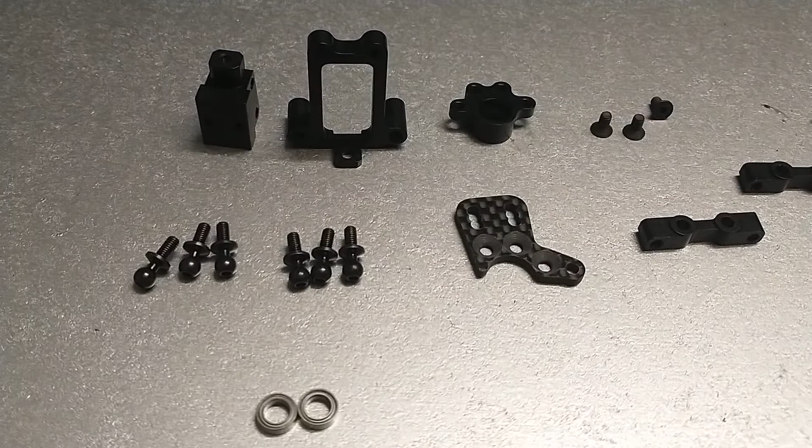I organized all the parts. We got a bunch of pivot points and some other miscellaneous parts. We have 3 lock nuts, some different types of screws oriented by size, and 2 washers that are really thick, with one set aside that's thinner. So you've got 3 of those washers, but one is thinner than the others, and you'll have to cut them out of a bag similar to that.

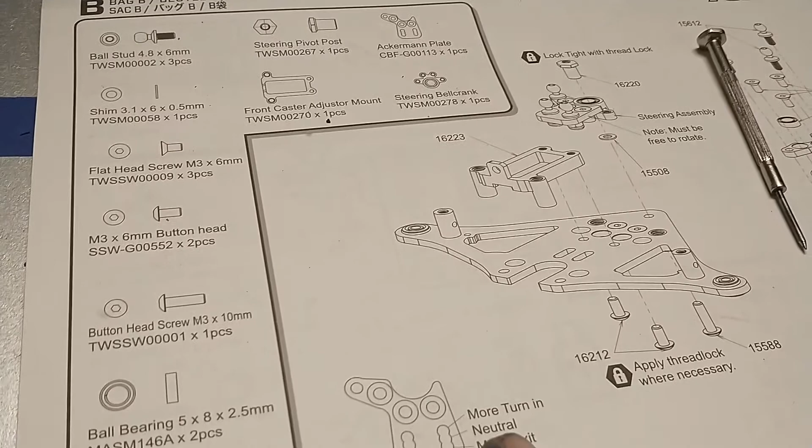So let's begin. Let's see what we're looking at right here. We've got to assemble - we've already done that. Now we're going to assemble this stuff, and these are pretty good at being a 1-to-1 ratio. If you don't know what 1-to-1 means, it means this screw, whatever it is, should be a very close match. We're just going to attempt to assemble everything as it's seen right here.

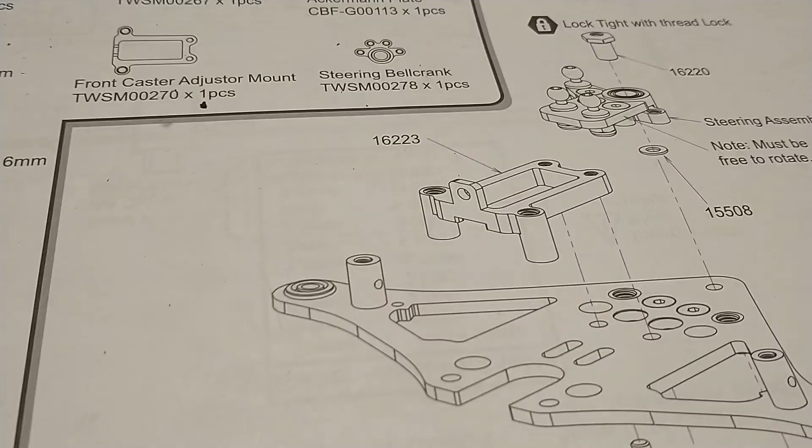Okay, so at first glance it looks pretty straightforward. We've got this piece right here - it slides into those holes like so, and sits recessed inside those 2 big holes. So you're looking for the appropriate hardware.

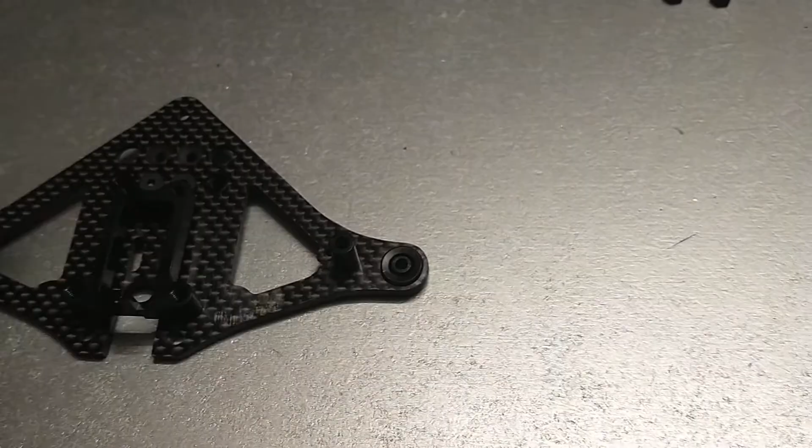This, in my opinion, becomes a little more difficult because, for example, this one right here - they call this 16220, but luckily there's only one of these, so it's easy to identify. But it's not 16220, is it? No, but it's still easy to identify because there it is right there.

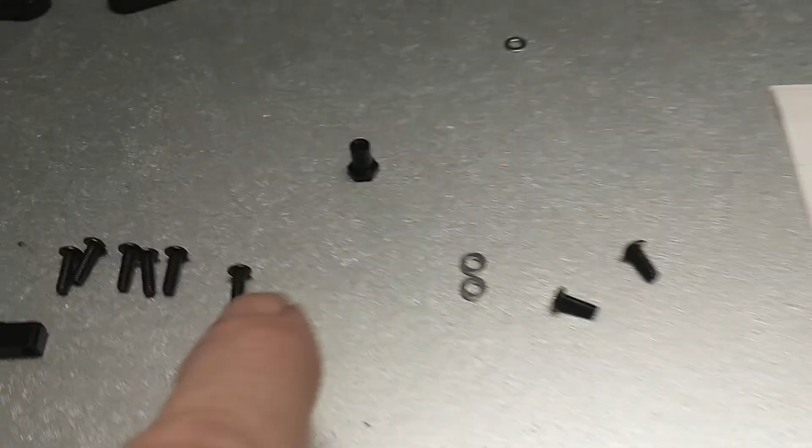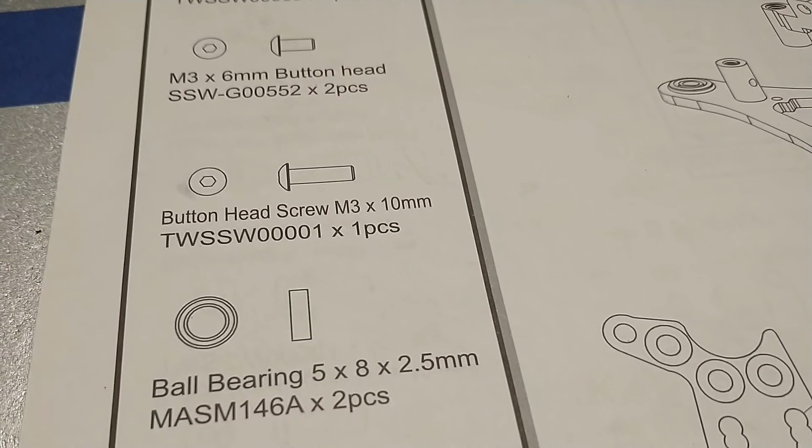So I want these 3 right here - 16212, and one 15588, and it's not listed here. 15588. Not listed there, so I guess we'll have to do our best guesstimation.

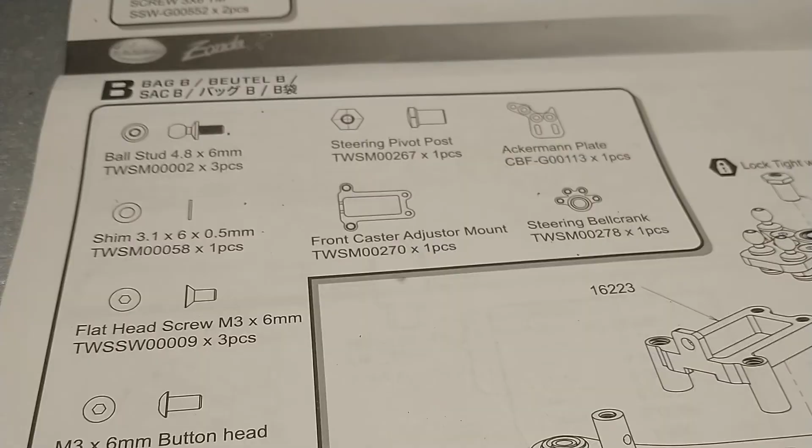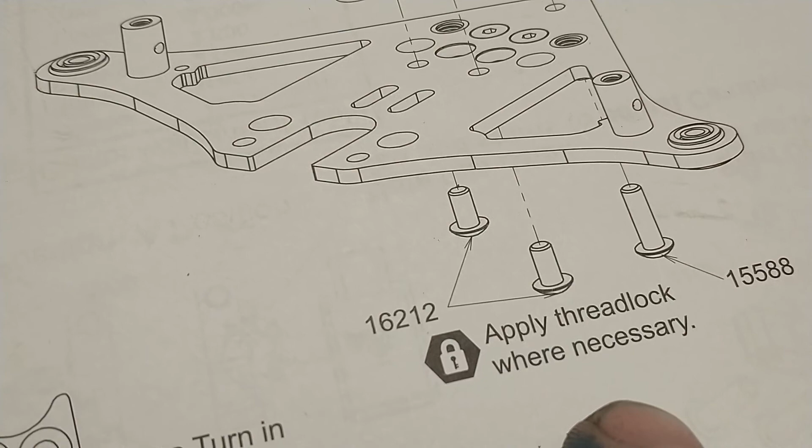Okay, as near as I can tell, it looks like we're getting 2 6mm and one 10mm, and these 2 here, by description of a button head screw as they're calling it, are the 6mm, and then one 10mm.

So we're going to run this screw through the chassis plate into the backside right here and right here, which is going to look something like this - right into that screw hole and that screw hole over there.

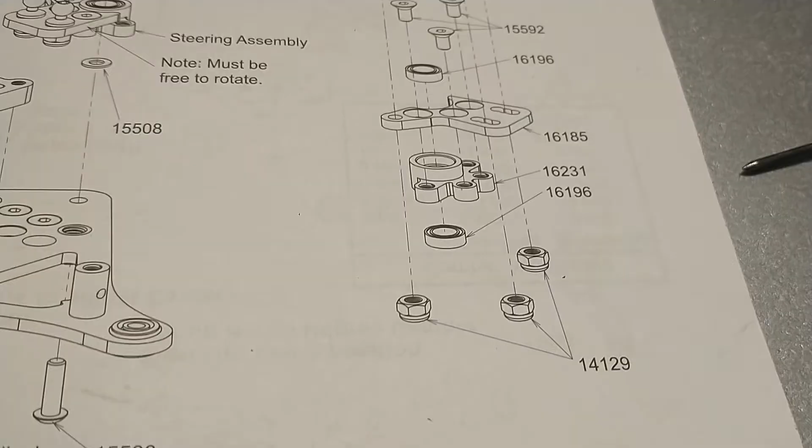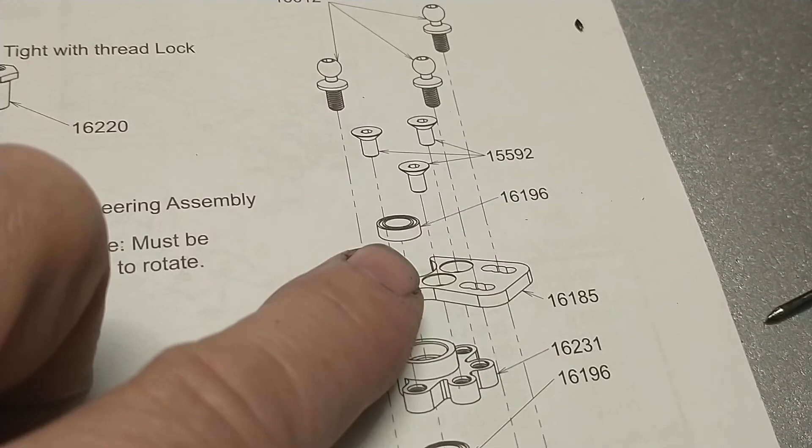Alright, so now we've got to make this piece right here. It looks like we need 3 pivot balls, 3 flush or countersunk screws, a couple of ball bearings. We need that piece, this piece, the other ball bearing, and some lock nuts.

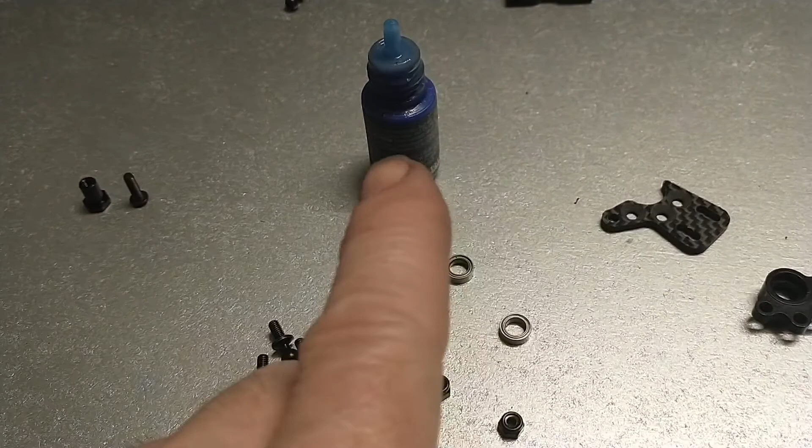So I kind of have it arranged similarly to the picture. Got the parts that I needed, and I got some Loctite. Wow, this camera has a huge delay. What a huge delay.

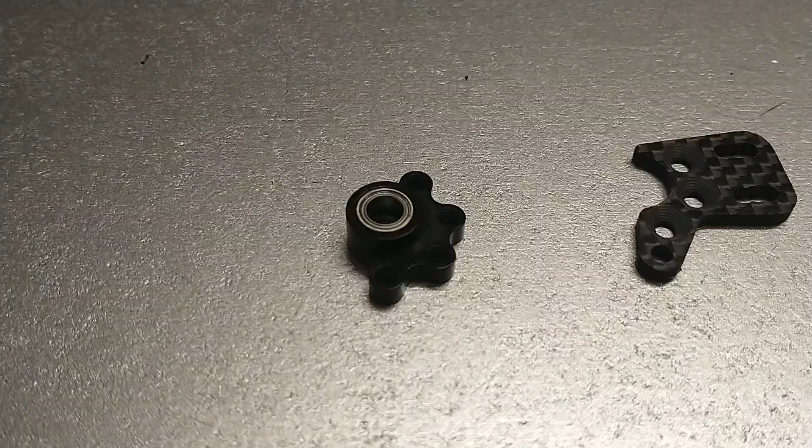So we got our ball bearing in there first off, and then it doesn't say which of these 3 countersunk holes to go in - either one of these 3 holes. They could go 1, 2, 3, or 1, 2, 3. It doesn't really make it clear, in my opinion, which 3 holes.

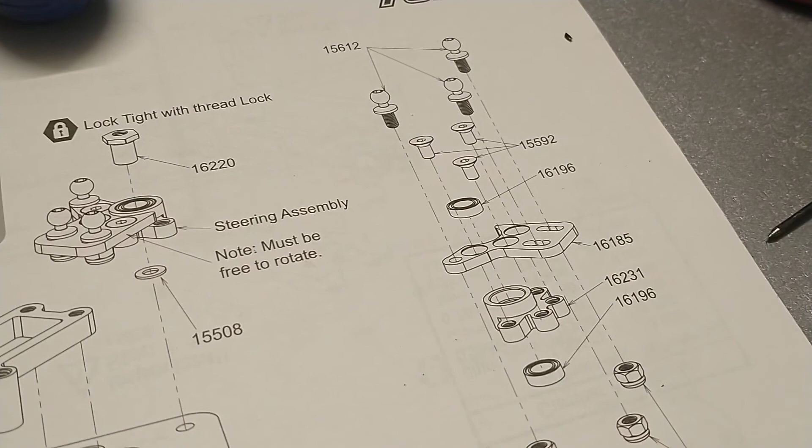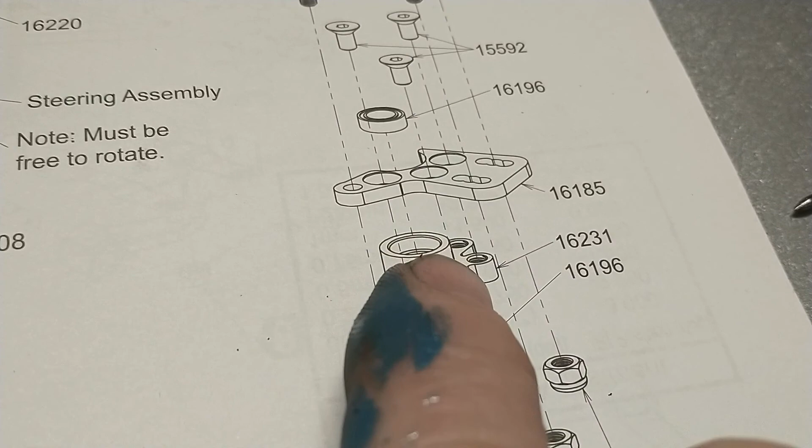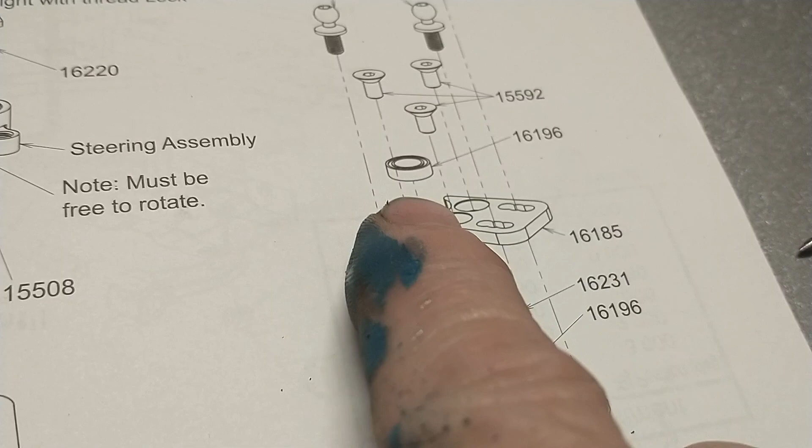It looks like that one for sure, so I guess I'll start there. But it also looks like this dotted line also goes through the back one too. I'm not exactly sure, but I guess I'll start with the front one here, because it definitely looks like something is going through there. This tapered or flush screw looks like it's going in the front one. So that's where I'm going to start.